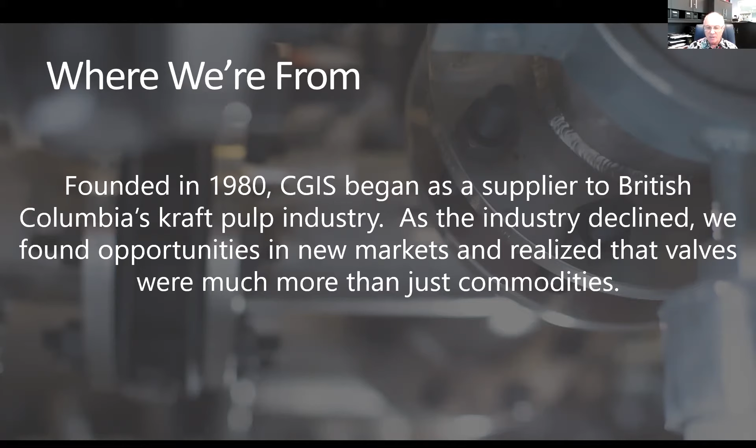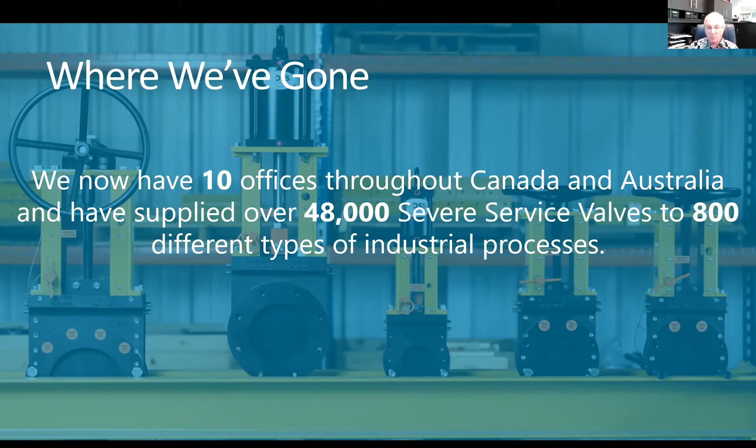But as it declined, we saw that we had to move and get elsewhere. So today we are 10 offices throughout Canada and Australia, and we have maintained a record of what we have internally called severe service valves, and have sold over 48,000 of them to a lot of different industrial applications.

As Julie said, I'm trying to share what I've learned and try to bring some new things to industry. And the MSS has given me this platform, as ASTM. And I think it's very important that as we grow older in this industry, that we find opportunities to give back to it. So really, what am I?

I'm a person who loves valves. I got involved in it, as I said, really early. I've had some really good people in my life help me.

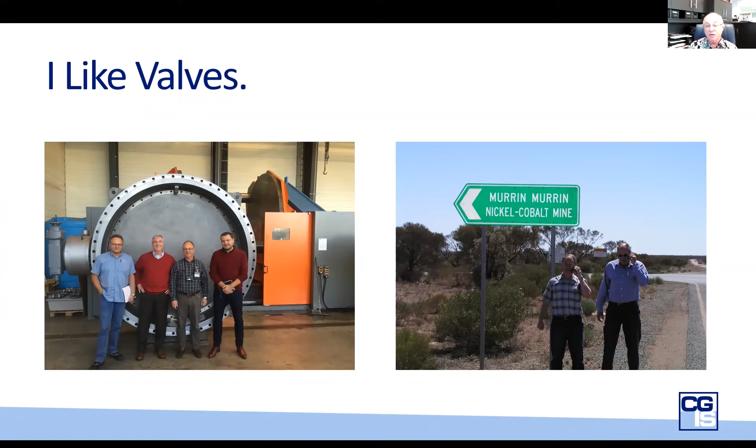The people on the left, that's Adams, a very interesting company from Germany and Houston, Texas. And one of the people you see on the right is actually a Valve Technologies distributor too in Australia, a very good personal friend of mine, Phil Brannigan, where we worked in Australia on the cutting edge of an industry called hydrometallurgy. All of these things went into what is going to be evolving from this presentation.

So I'm hoping today the presentation will give you a bit of a background in the history, show you why it should be useful, show the other classifications other than severe service valves, explain where I think we're headed, and then give you some key factors for selecting these things if we all agree that they're necessary.

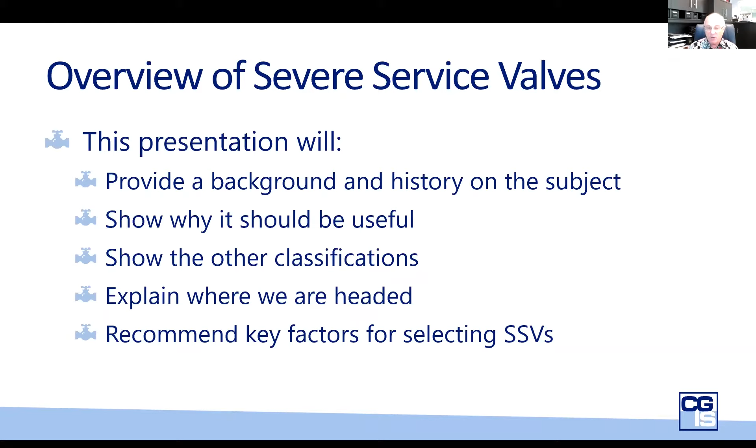The perspective I'm going to send over today is from my life as a salesman. That's how I look at all this. So I am a salesman, and even though I have this title of a chairman, that's not what I do. I've always been in business development, and the sales is what attracts me.

I think I'm a good one, not in the sense that I'm successful at selling, although I guess I am in a way, but I do it from a perspective of trying to look out for the benefit of the customer. It's like I'm spending my own money and making sure that what I buy is the right thing.

Part of my DNA is this thing called fairness, which itself is very subjective. I detest losing orders when I find it's not fair. And that's one of the drivers of defining severe service for me.

I've learned that there are no bad valves in the world. There are valves that are put in the wrong places and they fail. Just as there is no perfect valve, every valve has an Achilles heel. I'm a huge fan of valve technology because I know what it can do, and its design is one of the closest you can get to perfection. But still, it's not perfect. There is no perfect valve. So we always have to try to find the right application, the right valve for the application.

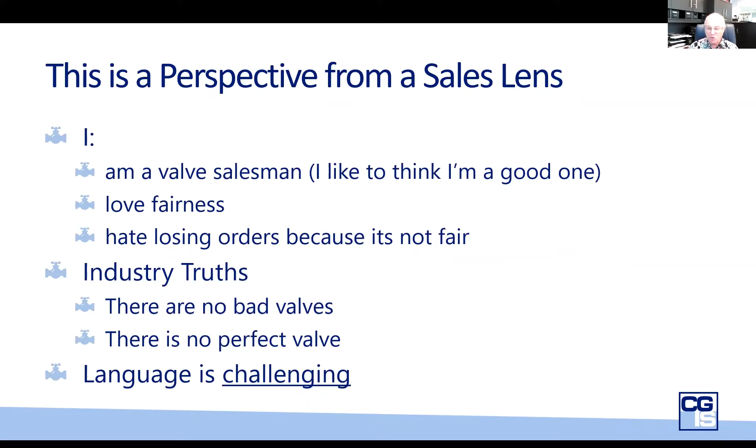On top of all of that, we have this thing called language. When we're talking about the same language, English, we have a challenging time confirming that the idea being presented is understood by the people listening. So language must really be focused on to make sure we get the right thing from what we're listening to.

I bid to the specification, which was clearly class 300, 740 PSI rating, 50 bars. I bid and lost. When I lost, I was surprised because I figured we were one of the world's leaders at this type of application in valves, and I didn't know who won until a year or two later.

I went to this mine in Chile and found out who the winner was. Then I realized why he won. He won because he passed the technical portal that said this meets the spec, and his price was lower. Well, of course it would be lower — his valve was rated to 300 PSI, and mine was 740.

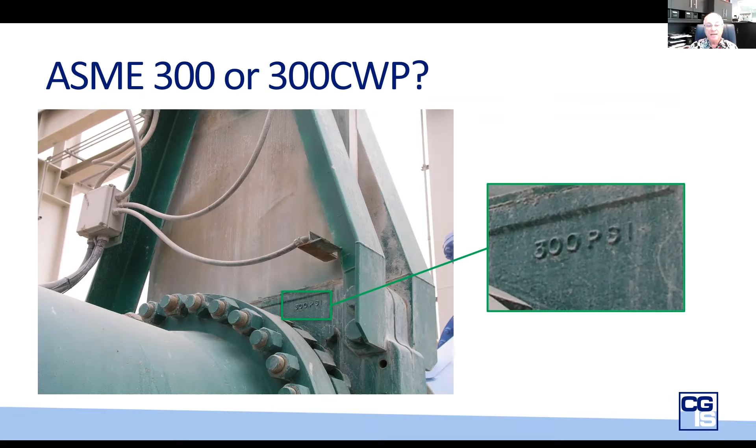So that was another arrow pointing us in the direction we're going: defining severe service valves, then defining fit for purpose valves, and then defining general purpose valves.

I want to stop for a second and have you visualize these three different criticalities. When I proposed this back in 2014, I didn't use those words. I used severe service valves at the very top, the most important valve. In the middle of the three categories, I proposed general purpose. And for the bottom, I proposed commodity.

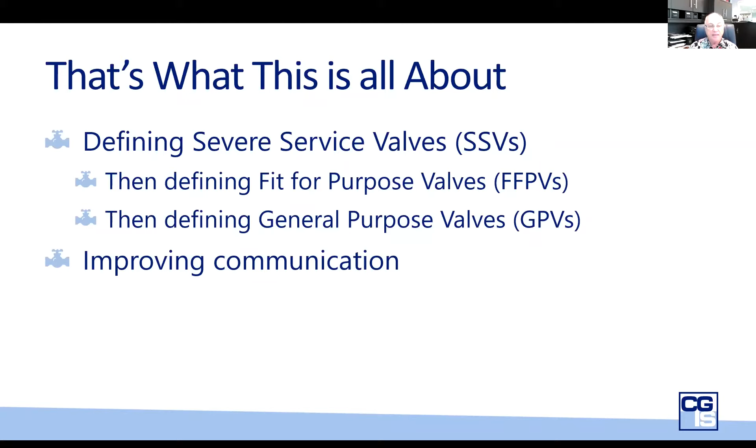The explanation, I think, will come along the way. Today I can't use those three different ways of describing it — I have to use these three, and I'll explain as we go, along with the communication about how this is done.

I want to make sure we're all clear that there's a very big difference between subjective terms and objective terms. Early in my career, I learned language like 'high performance' and 'tight shutoff.' They sound good, they sound important, and they are important in a way, but they're subjective. They don't have any way to really measure — how high is high, how tight is tight. Those things need to be put into a place where a third party can agree that the measure is correct.

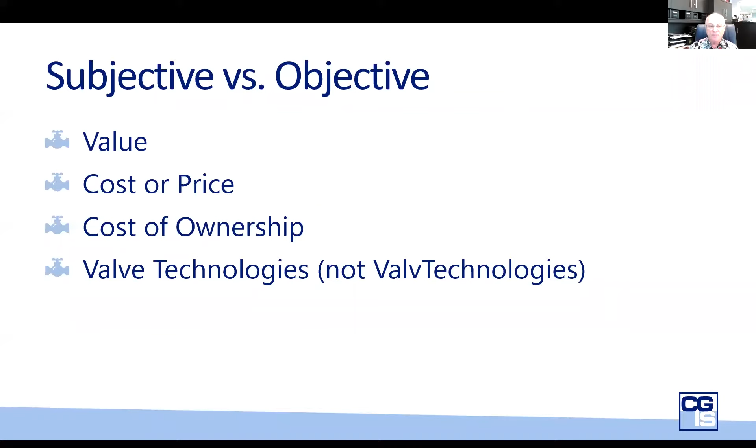So we have these things in our lifetime called value, and we have these things called cost and price. When we try to compare the cost to buy something versus the value of it when it's actually in use, there's a big difference. For me, I've always wanted to focus on the cost of ownership, and then look at different technologies about valves — not Valve Technologies the company, but technology about valves — because as I mentioned, there's no perfect valve, and each valve type has its place.

Valves, for all of us — maybe brand new in the industry, or some of us, like me, been in there forever — we all have a different way of looking at valves. But I think all of us in the world will look at cars in a very similar way. So I'm going to use these three slides just for a minute to give you some more ideas about communication. Here I'm asking you to choose which of these three cars is the right one for you to buy for your needs. I'm giving you some data.

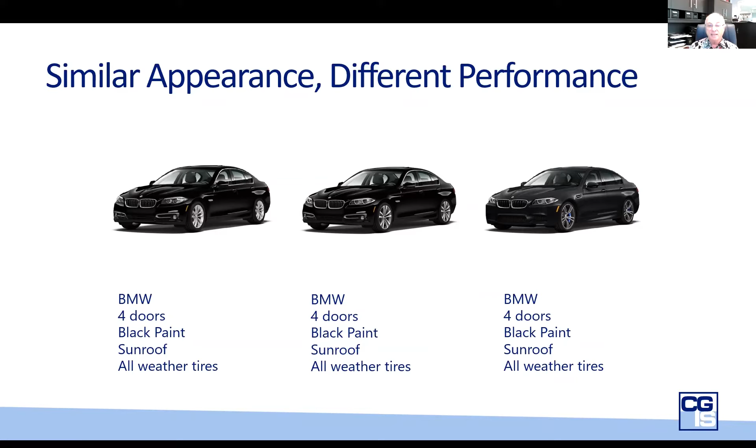I give you 5 pieces of information. The problem here, though, is this information I'm giving you isn't enough for you to make an intelligent selection. So I'm going to give you some more information. Now some of you may look at that and say, okay, that's what I need. I want to win a rally in a race, so I'm going to buy that one on the right-hand side.

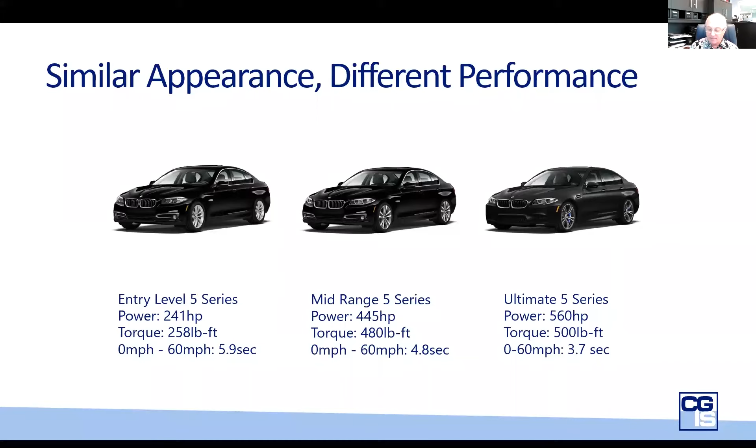Some of you are saying, no, I want this for my family vehicle, so you're going to buy the one that has the most economical fuel rates. That's the one on the left. And when I finally give you the last bit of information, how much it costs to buy, then you can make a better solution and choose what's best for the application.

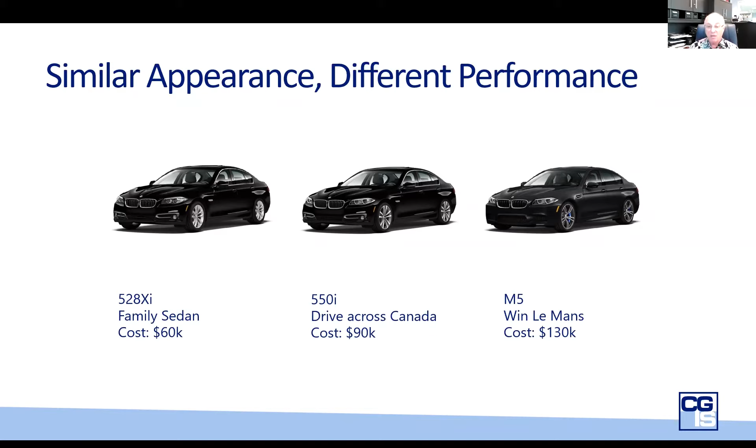So let's see why we think we can figure that out. Do control valves really control? And if yes, how long and how well? Do isolation valves really isolate? If yes, how long and how well? What about when the applications are very challenging? How do you arm the valve to survive? Do we need a different way of looking at severe service from general purpose? I believe we do.

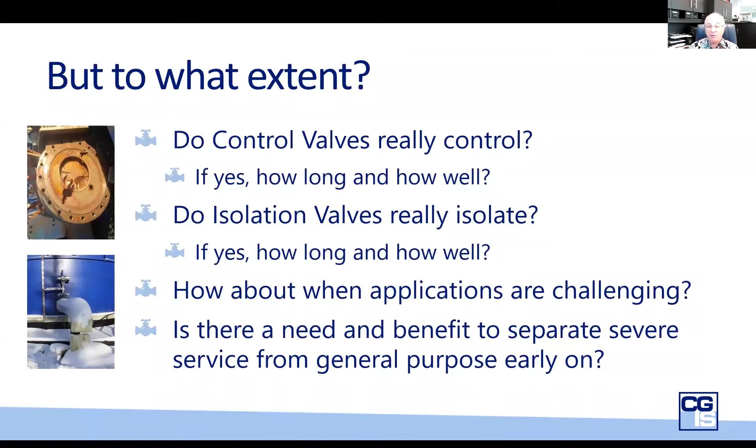In 1995, I had been playing salesman at this Cominco refinery, a metals refinery that is 100 years old. In a long time of being in business, they developed a lot of habits. They bought a lot of historical products. They had 23 different ways of making metal, refining metal, with different processes that required different types of valves. But in the 100 years that they were there, they had a lot of baggage, a lot of older technology. We got an opportunity in 1995 to really help them modernize the way they used valves and analyzed valves.

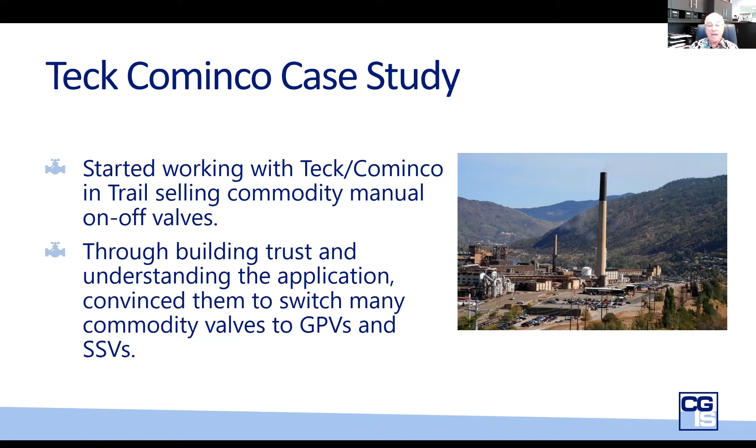We had a trust with them. We got an order, a 5-year order, to help them modernize their plants by using the proper valve. And this slide's a little rough to read, perhaps, but as we showed them again, this language that I'm using then was the commodity, general purpose, and the severe service. We improved their revenue by giving them more severe service valves where they were required and reducing the commodity valves where they were used.

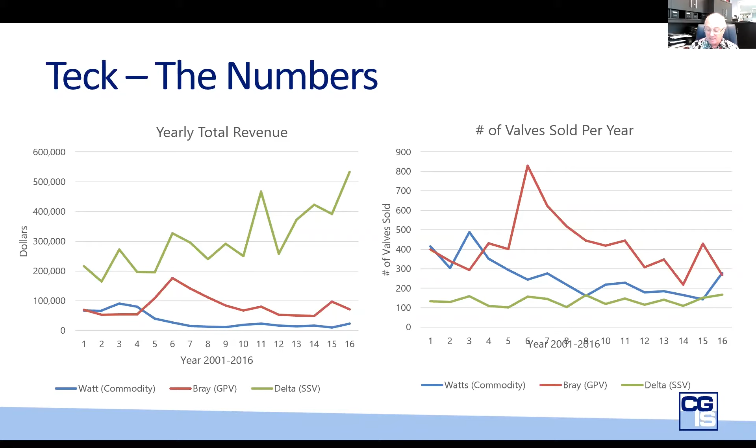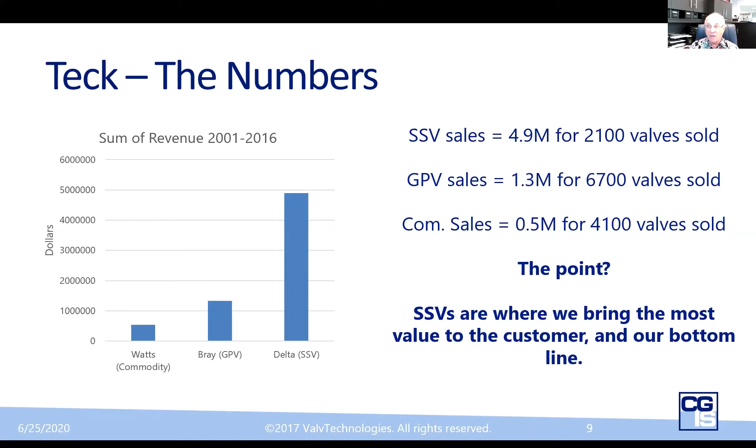So over years they benefited greatly. This was a good education for us and a very profitable education for Teck in those days. If you looked at the actual revenue, we made more revenue ourselves, 4.9 million on converting them to severe service valves, and much less in the commodities. It was good for our company, but it was much better for Teck. They saved a tremendous amount of money buying less annually and having more runtime in their operations. So the journey started back then.

It continued to go, this journey to what is a severe service valve. I started to decide to write some papers. In 2014, I actually wrote my first paper on defining what severe service valves were. That was the start of that. And from there, I decided that this is something that's going to be valuable, I hope, and I tried to attract the attention of the industry.

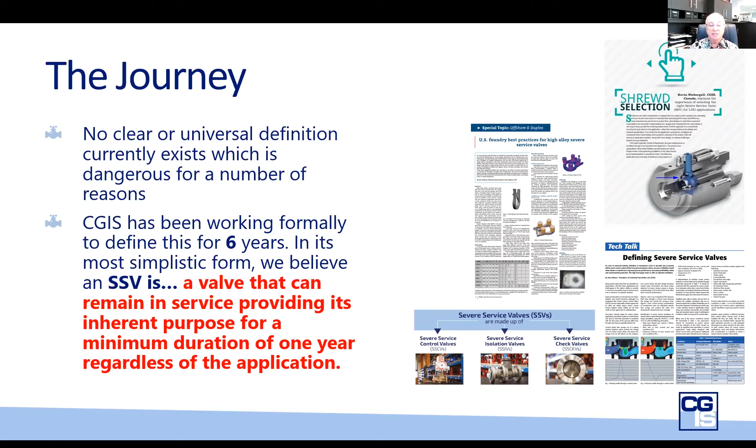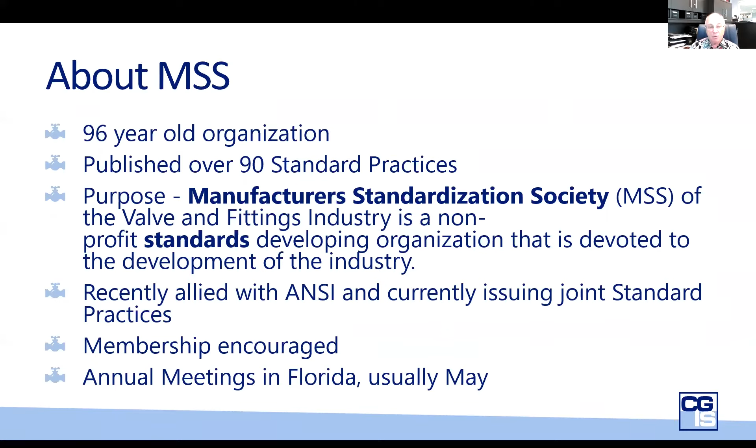What happened was MSS, which I had joined a few years earlier, mostly for the knife gate valve standards that were in those days really poor, and we needed to create a new one. They were eager and open to improvements in their industry. So I asked them, would they be interested in this topic? And they said yes. What I also would like everybody to realize, this is a great company society to grow, and if you're interested, please join it. They are pretty low cost to be a member, and you get a great deal of value, and you can participate in our industry for the benefit of everybody.

So right now, there's currently 60 standard practices in update. Their mandate is to update them every 4 years. I can tell you that for those of you that are in the knife gate valve business, the original knife gate, MSS SP81, made in 1960, it was surpassed by MSS 135 in 2010. We're now in the 4th edition of that one, and it's grown from class 150 through class 600 knife gate valves.

So it's been an expansion. There are 17 active projects right now, including severe service valves, defining them, and a new special high pressure gas test. In 2017, they joined with ANSI to jointly submit these units.

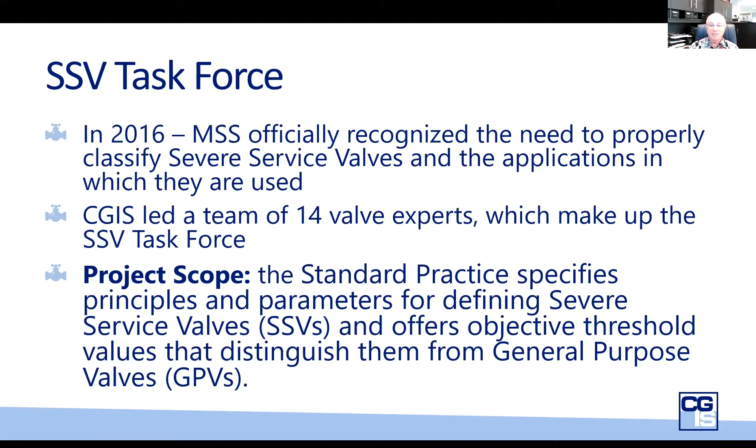In 2016, they officially gave us permission to go ahead, and we got a team of 14 people together, members from different companies, to do the task force. Now that's 2016, and today is 2020, which gives some idea about the complexity of this subject, perhaps, that we're not there yet. We started with a work number, PN 16-20, and we took a vote on those days.

We decided that this was the title that was acceptable, severe service valve. We had no negatives, and that's very important because you cannot publish a standard with any negative. They have to be resolved. So here's the start, the official start, May 11, 2016.

Now, today, I'm still waiting to publish it because since then we've had one negative vote that we are unable to convince to change. This is an internal issue that we're trying to wrestle with, but it's a bit frustrating that it's taking this long to do something that everybody else in the MSS thinks is a good thing. I do accept that the negative vote has some validity, but it should be resolved because it's good for the industry. So there was a purpose.

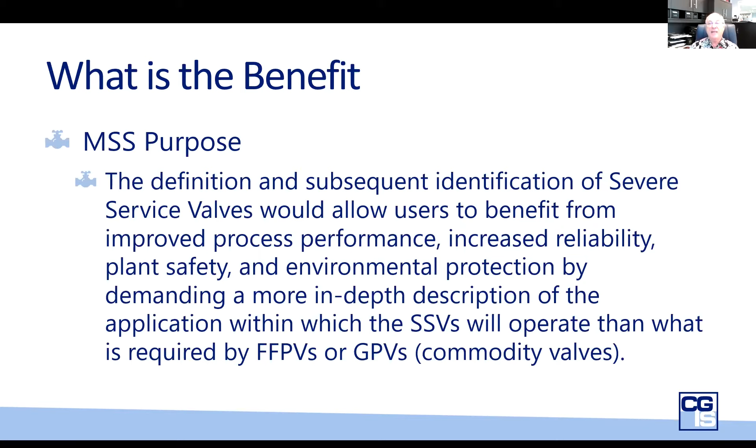Again, in the early days, it was defining just severe service valves, and then it's grown, and we're trying to get to a point now where we can define not only severe service valves, but the other categories. We agreed with measurements on what a control valve, severe service valve, looks like.

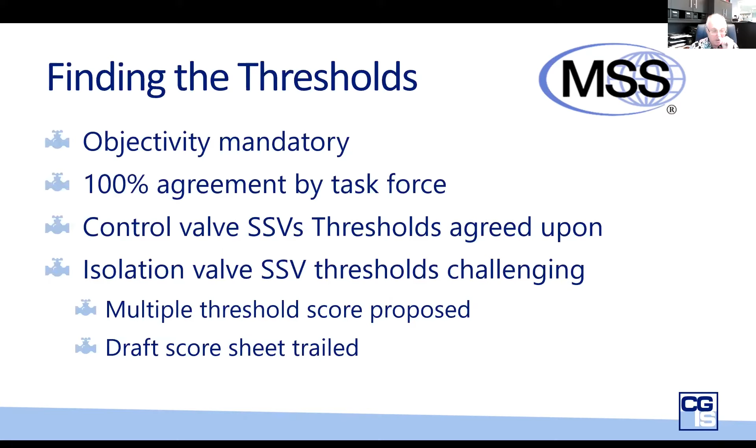There is very clear evidence that if you have a certain condition, like cavitation, for example, that is definitely severe and it has consequences. The challenge that has taken us this long for isolation valves is that there's no single clear threshold for which you can say yay or nay. What we've had to do is come up with a multiple threshold score, and that's where we're at today. We will show you what that looks like in a minute.

From my perspective, and this is really from our company's world and probably very similar to valve technology, there are severe service valves in three different categories, although check valves are not really a secondary part of isolation control. They're somewhere in the hybrid side. But isolation valves, definitely. Control valves, definitely.

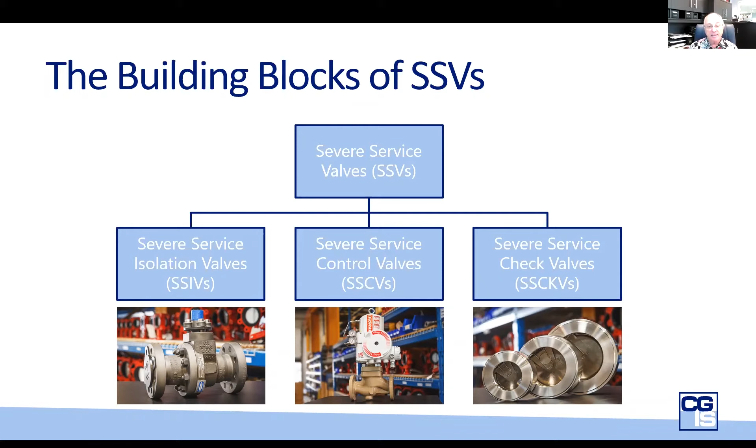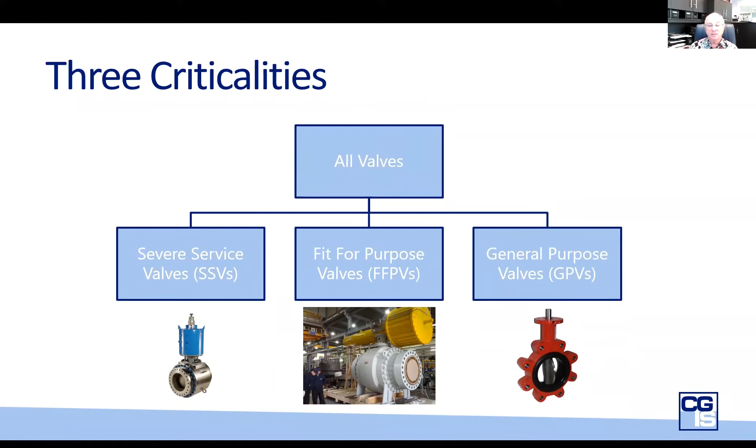Now we're trying to put them into severe service, fit for purpose, or general purpose applications, and give guidance on why that happens and why it's important.

If you look at the characteristics of a general purpose valve, they're typically not consequential if they fail. They shouldn't be if they do. You look at things about a leak rate. Is it important? Is it critical?

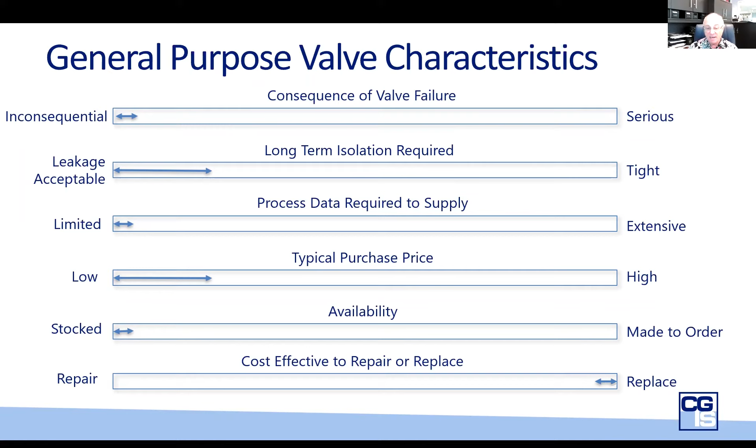If it's important, they shouldn't be used. Do you need to have a lot of process data? Not necessarily. Really, you're buying a commodity. The purchase price is low, availability should be from stock, and you're not likely going to repair it, you're just going to replace it.

A little harder and more important category would be fit for purpose, where the consequence of failure is higher. The leakage acceptability may be uniquely tighter. Your purchase price is not the lowest thing in the world because it has value and you're going to be able to amortize that cost. It's likely still to be stocked, but maybe not everywhere, and it may start to become cost effective to repair it.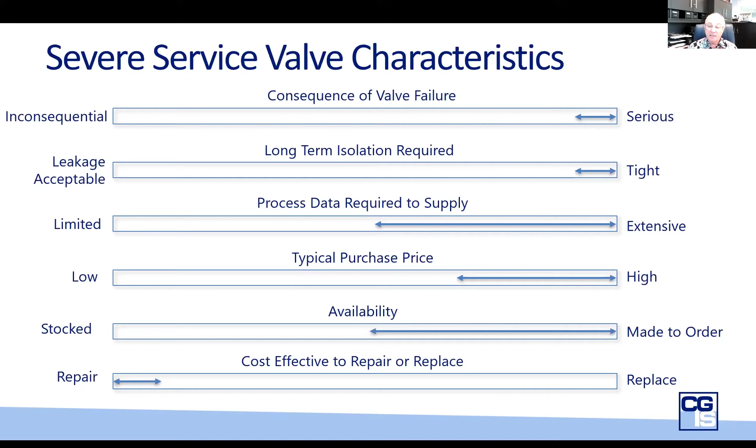Availability - it's not likely to be stocked, although more of us who focus on severe service valves are willing to put in inventory that is in stock. But often it's a made-to-order recipe, and you should likely repair it because it is an asset.

So what we did, as I mentioned, it's very challenging to come up with a single threshold. We came up with a checklist and a score sheet, and I've used this myself for the last year or so. It's getting to a point where it's got a high degree of sense - it's starting to work. I don't think personally that we're actually there yet, because this is the starting point of our journey. We'll have input from the industry where we need to change these values and come up with something different. But the idea makes a lot of sense.

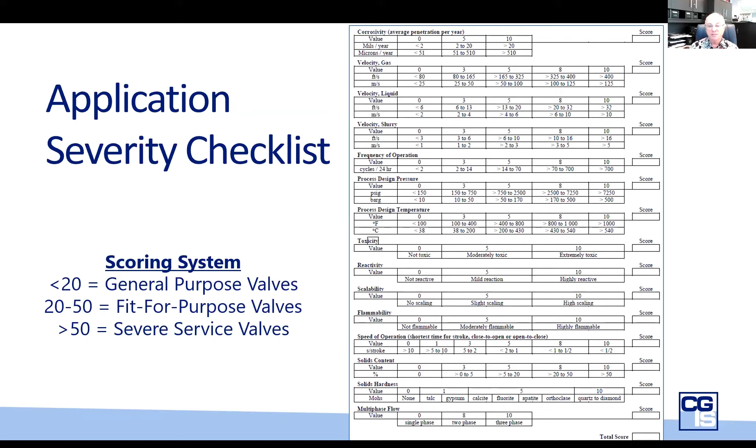So under 20 on a total score, you're likely to be able to use a general purpose valve. Between 20 and 50, more likely to use a fit for purpose. And above 50, then you need to have a severe service valve. So this starting point gives us the objectivity that we want, to include the fairness factor, or having more people see the world from the same lens instead of eyes.

So what happened from the beginning in 2016, when it was defining severe service valves, we are now through the draft - I don't know how many drafts, it says draft 5C, but it's probably draft 20. The title and scope have changed to guidelines for classifying severity of valve service conditions. This is a big change, and in MSS, any change in the scope and title means you've got to go back to the drawing board and have to revote. And that may be one of the reasons it's taken so long to get this thing across the board.

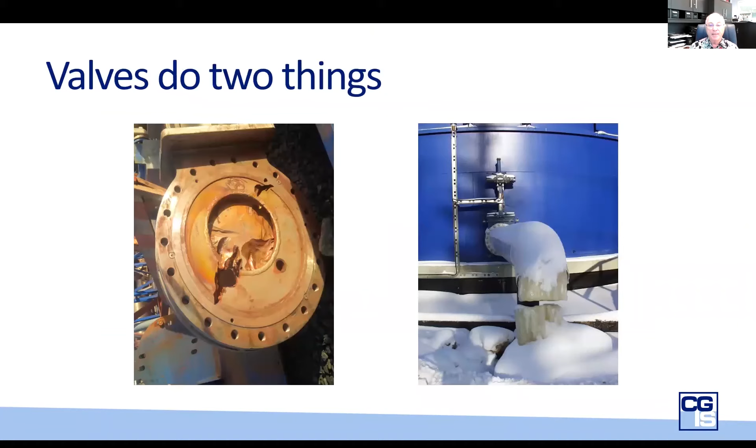So again, as I mentioned, valves only do two things. Let's go have a look at some of the details that come about this. So whatever industry we're in, there are applications that should or benefit from using severe service valves. Some industries actually have a much higher percentage of severe service valves than general purpose. You can compare a refinery to a wastewater treatment plant - you're going to have way more SSIVs in a refinery than in a wastewater treatment plant. But a wastewater treatment plant also requires a valve to do something that is challenging for most valves to do. So even there, we will have a place for an SSIV, just a lower percentage.

So in my opinion, and this is an opinion, not fact, but I believe from what I've seen, severe service isolation valves are not gate, globe, or checks that are made to those specifications. I've never seen a wedge gate valve isolate as well as other valve technologies. It's an industrial revolution invention - it's time to be retired to that bottom rung. I probably am going to offend a few people who sell that, but that's my opinion.

Soft-seated concentric butterfly valves, like the old Keystones or Greys, they are not, in my opinion, a severe service candidate. They may go into the middle section. SP-81 knife gate valves, the original knife gate valves, they just cannot isolate properly, so they cannot be severe service isolation valves. And pinch valves are in that same realm.

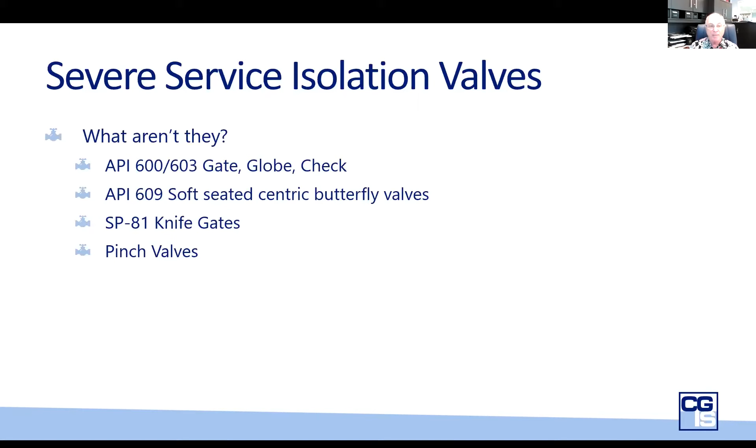Triple offsets, guided shear gates, which is a passion of mine - you'll see why in a minute, because I'm very involved with this type of valve - and the parallel slide gate, again this is the valve technology ISO gate. It's quite different from the 100-year-old valve that was designed as a parallel slide back in the Industrial Revolution.

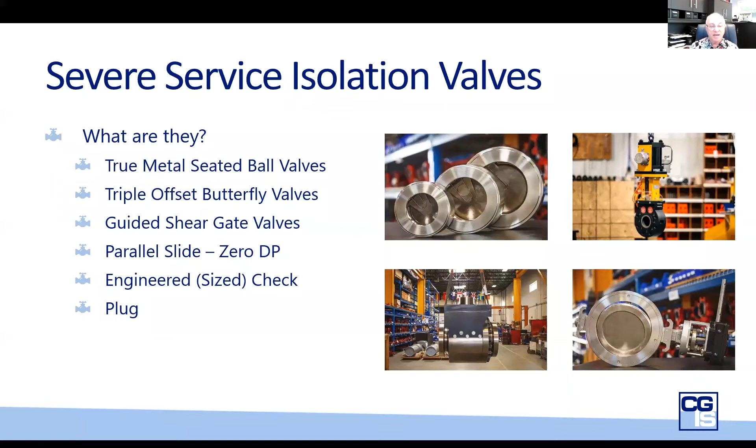And the word check valve 'engineered' is because check valves, like control valves, should be sized for the flow, not for the size of the pipe. That's one of the biggest reasons why check valves fail - they're put in at pipe size. And there are plug valves, sleeve lined, that meet this terminology.

One of the things I want people to think about when it comes to isolation valves is the life history of that valve when it's doing its job. Isolation valves are kind of unique in that they have 4 different states of life: they're either fully closed, fully open, or cycling between those 2 states.

This has led me to understand the importance of knowing more about the valves I'm trying to solve for in isolation conditions, when I don't know how many cycles I'm expected to live through, I don't know if I'm starting as an open or closed valve, and I don't know what happens to the dynamic state if flow is moving while I'm closing or opening.

Without knowing that, I can't hope to make a good solution. The control valve side of business gives that inherently because we're solving for flows that are continuous. Here I've got 2 static basic conditions and 2 dynamic. So I need all that data, which is more challenging than you might expect in the beginning.

Corrosion allowance is a very important component of how well and how long the primary sealing components of my valve last, whatever it might be - a ball in its seat, a butterfly in its seat, a gate valve, a knife gate valve. What is that corrosion allowance so that when I'm in service after a period of time, I still have the integrity of those sealing surfaces to give me the isolation I want?

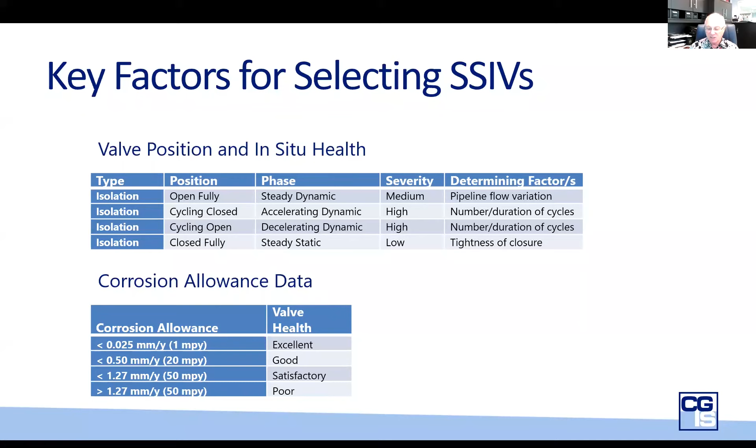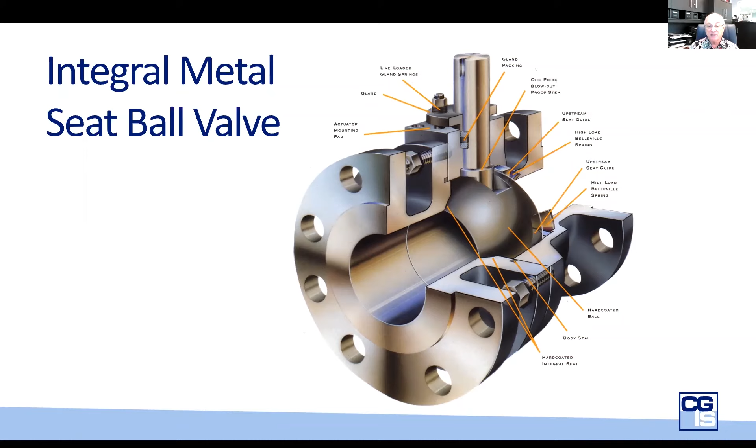So here's what we're looking at. This is the true metal seated valve that I've grown up with. Part of where I am today is because of valve technologies. I really think Kevin Hunt was a master magician in bringing the concept of the integral seat from a different valve into the ball valve, and having the ability at that time to coat it with carbides was a great gift to the world. This is the finest isolation valve in the world, in my opinion.

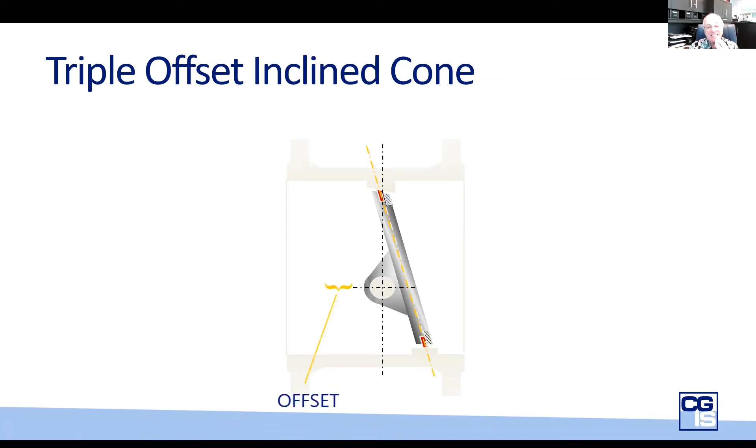I also have a great respect for the triple offset. This was designed and patented in 1960. I really trust it to do its job. This is Adams' invention, and what I like about it is if you look at it carefully, it's very careful to understand they have different isolation abilities based on the amount of torque you give to this valve.

So if you look at the bottom, if you only give 64% of the closing torque, it's not as tight as I would like if I'm on steam. Class 4, that's failure in my opinion. Class 5, that's failure in my opinion - it's allowable leakage. As soon as you get to 80% unidirectional tightness, then in one direction you get 0 leakage.

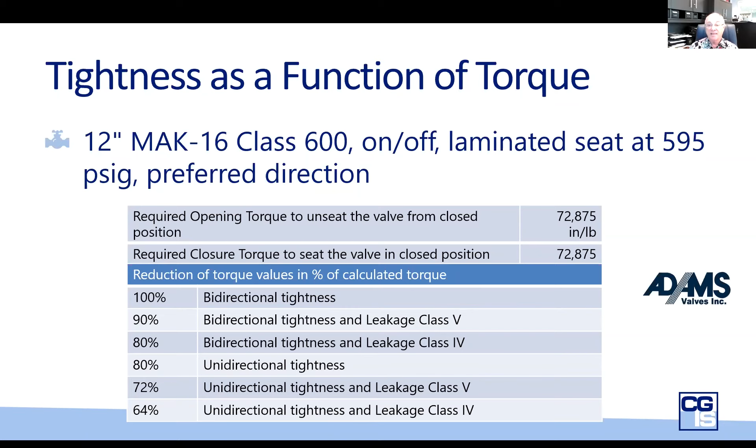The Germans, which this company is, use 'tightness' - perfect tightness is the same way I say 0 leakage. And if you do bidirectional, 100% of the torque required, 72,000 inch-pounds on that valve, you'll get bidirectional 0 leakage. That's objective - that's not saying 'tight,' that's saying 'wow, that's measurable.'

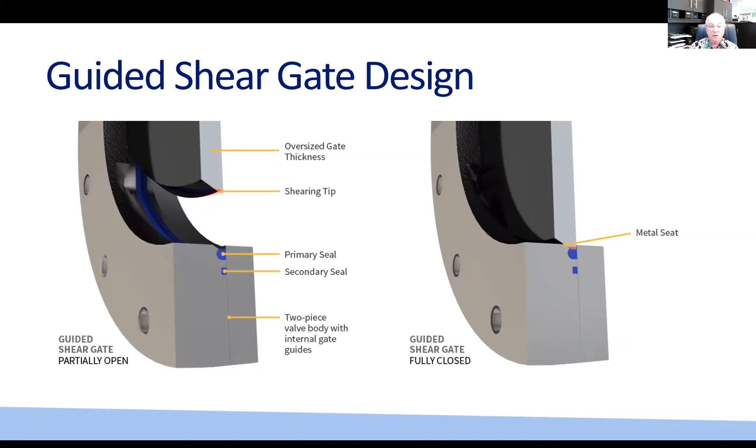The guided shear gate, as I mentioned, is a type of valve very close to my heart. I sell a lot of these globally. This is again a 1960 original patent, but it's been improved in 2017 to be a much different animal than it was in the past. And it's able to cycle, close, and isolate perfectly - 0 leakage in dirty, disgusting applications.

And if we have time today, I want you to look at this picture - anybody can tell me there's 2 very wrong things about that valve. So have a look, think about it, and we can talk about it.

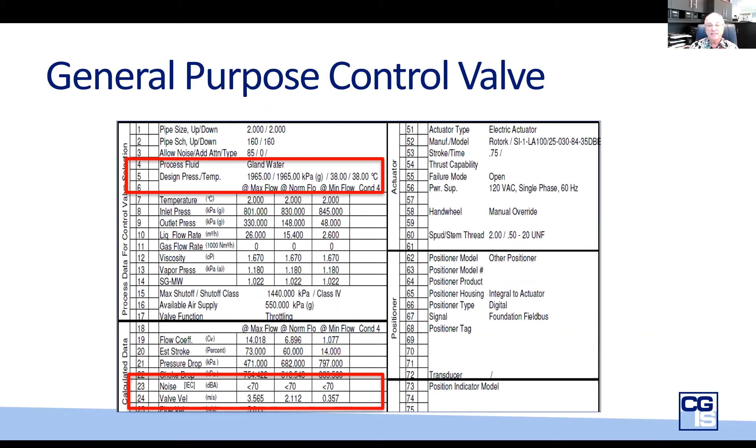So let's go look at general purpose. Why is it general purpose? Because the fluid is easy - water. If you look at the velocity, it's not very quick for a control valve, so this doesn't require a special design. If you look at a severe service control valve, it's much different.

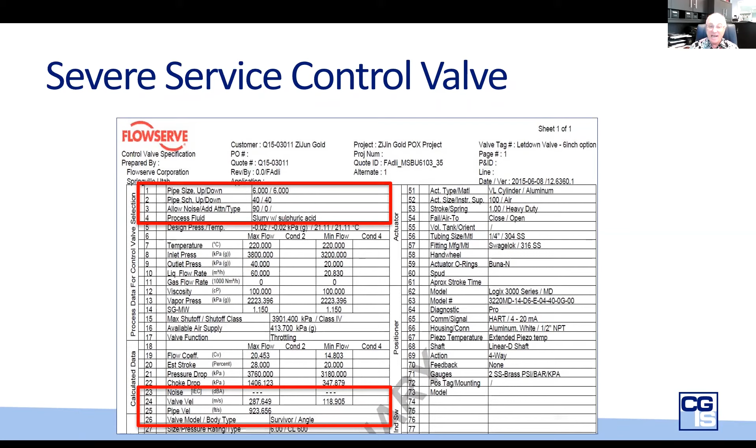Here's the process fluid - it's slurry, sulfuric acid, and it's really moving. Look at the feet per second - 923 feet per second of a slurry. That's a challenge. And the same thing in the ball valve.

Here is a very challenging ball valve in the mining industry and hydrometallurgy. The requirement here is something that came about in the industry maybe 15, 20 years ago - the so-called 'zero leakage bidirectional.' I wanted to know, what does that mean? How do I test it? If I'm metal seated, give me a test that requires zero leakage. I don't think there is one. Valve Technologies has one - that's an internal company.

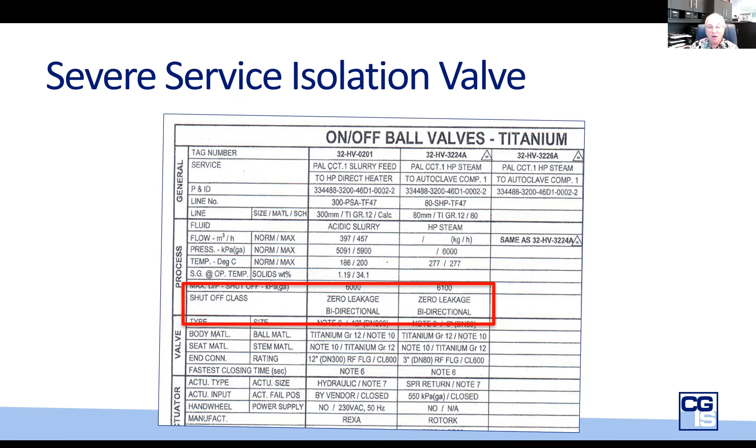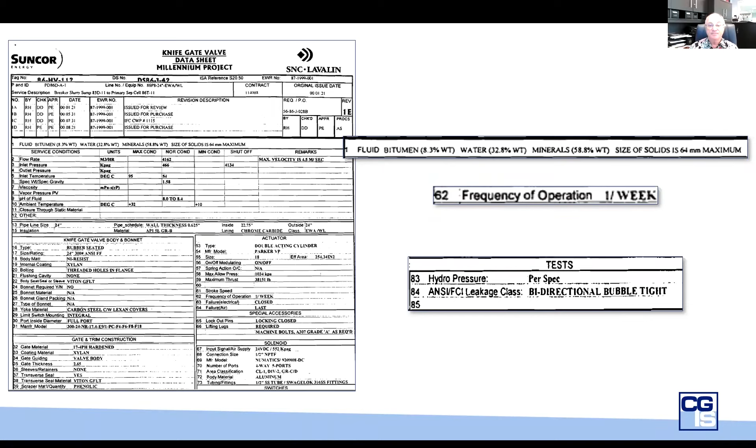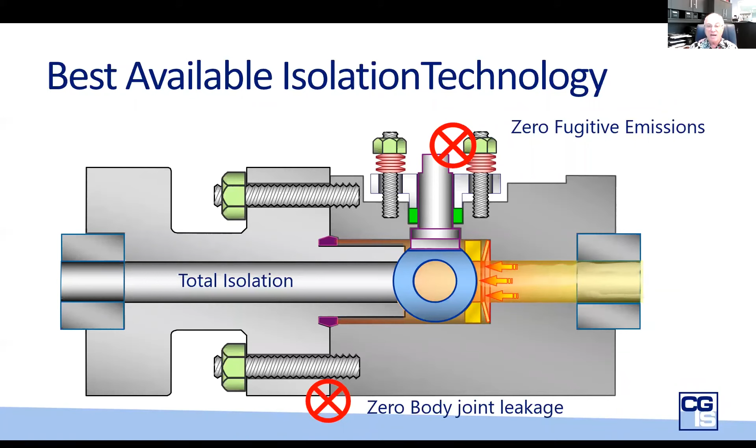That's a challenge. So what we do is we look at all of these applications and say, which is the best technology, best available isolation technology? Here I'm also always going to come back to Valve Technologies, which has an incredibly good way of solving that isolation - the so-called best zero leakage, total isolation. Not only closing fluid from upstream to downstream, I don't want to have any fugitive emissions. I want zero there. I don't want any body joints. I don't want anything from inside going out. That's the best technology. When things aren't perfectly tight, bad things happen.

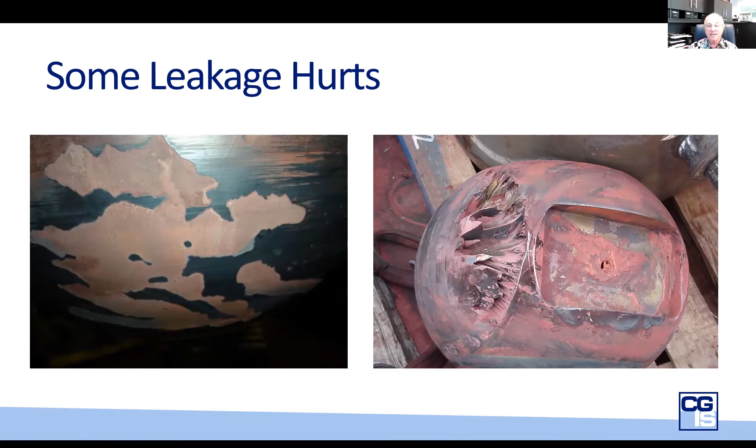Here's the picture on the right, a valve that cost $300,000 to buy and lasted 17 weeks because it started to leak. And as soon as it started to leak, the differential pressure, which is the enemy, and the fluid, which is the slurry, made that valve fail very quickly, and they lost the containment of their system. So there's lots of bad things that happen when you choose the wrong technology and it fails.

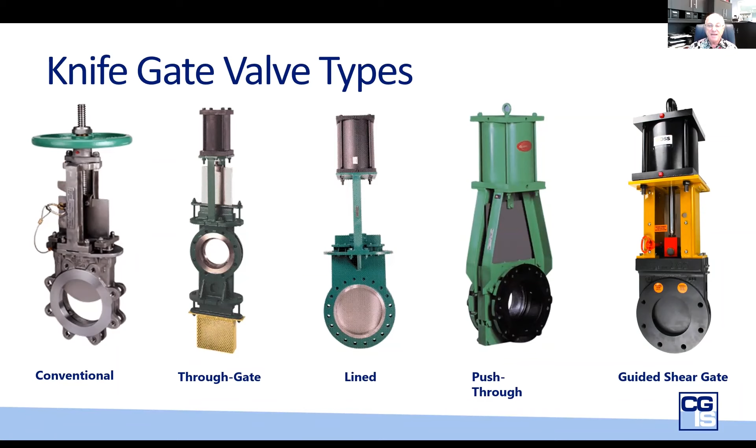And some of these are going to be part of where I'll give you some better examples. Here's a picture of 5 different types of knife gate valves. All of them are knife gate valves, but they all function differently. And it's this misunderstanding of how they function that causes issues.

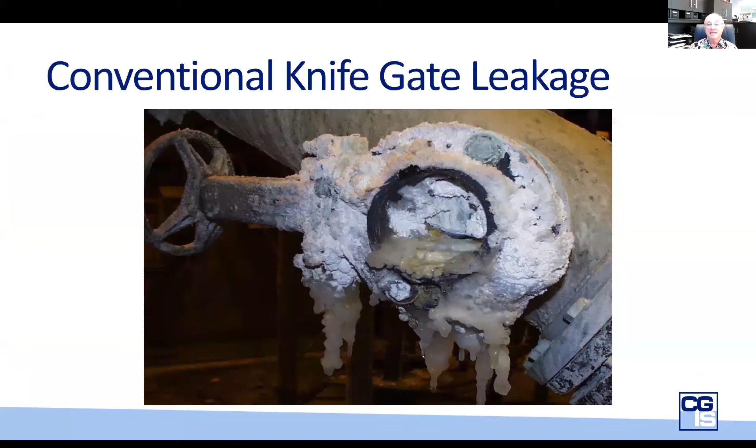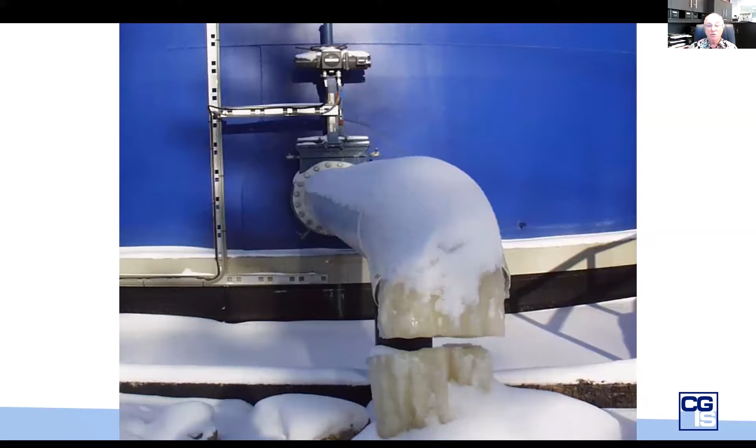Here's a conventional knife gate valve. It leaked, and because it leaked, it allowed the process that was pregnant to precipitate and become a clog for the valve to operate. This valve, very well made by a reputable manufacturer, failed because it had a leak rate far higher than what was necessary for the containment of what's inside it, which is just water. And here that leakage made an iceberg, which sealed the valve and wouldn't drain the tank if it was required to drain.

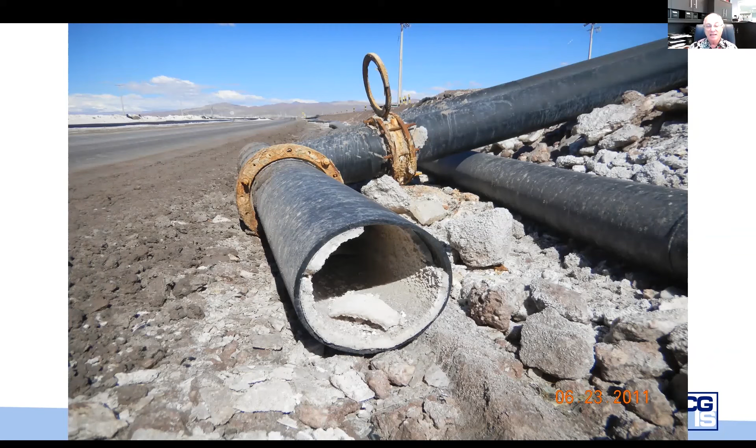This picture is important to me. When I looked at the data sheet to supply the valve, the fluid was brine. Well, that brine was saturated with solids, and what happened is they precipitated out as a solid inside the pipe. That's what's going to happen inside the valve as well. So if you don't factor in the extra drag or the presence of solids, you're going to have a hard time solving the problem.

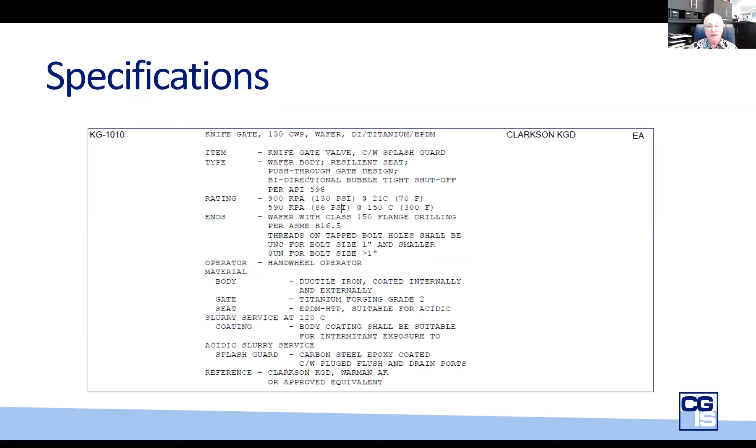I love to look at things from a different lens. Here I see a specification by a reputable engineering company that chose a Clarkson KGD, a very good valve for mining. But is this mining? Look at the gate - titanium grade 2 gate material. What mining would use that? And look at the body - ductile iron, coated internal and external. I think there's a pretty big difference in the corrosion resistance between ductile iron and titanium. And if I need titanium and EPDM to save my body, then I better make sure that the valve doesn't have external issues.

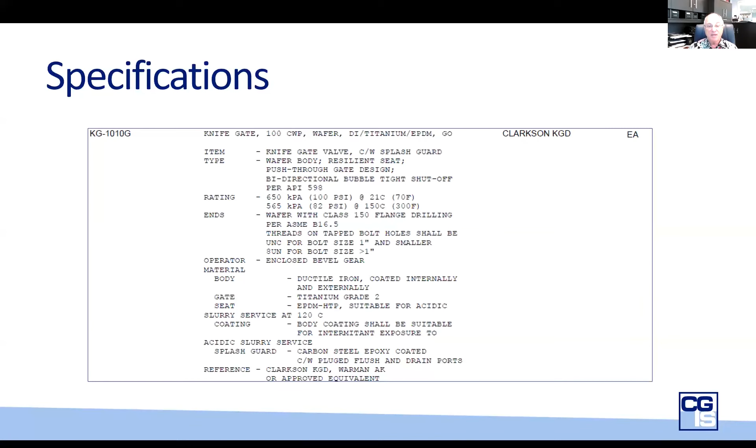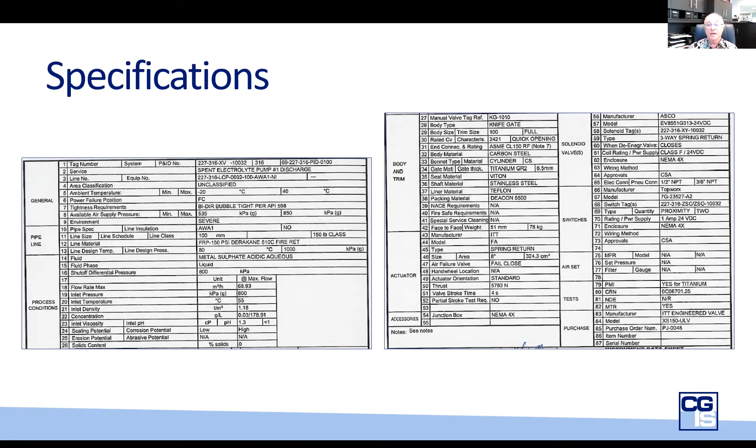So this one was built for a project which I knew would fail, because they didn't understand what this valve did. What they actually bought was similar - they bought from a different manufacturer, but a reputable company, ITT Engineered Valves, and installed it with a carbon steel body, not lined so that it was protected.

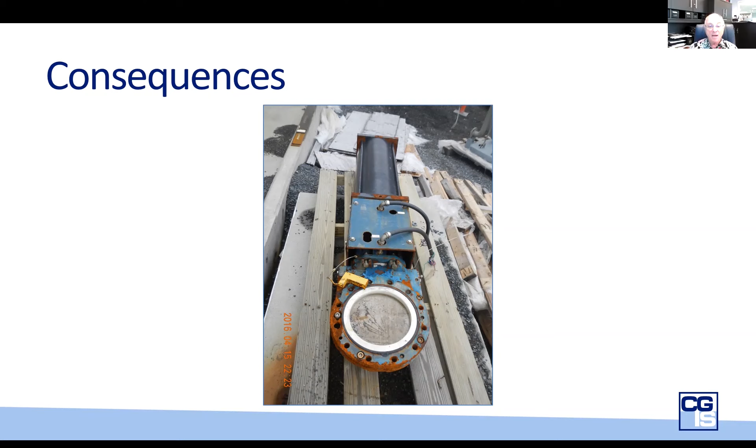But here's what happened. In a very quick time, external corrosion ate the body from outside in. That titanium gate and the Teflon seat were okay, but the valve failed, and the money spent was completely wasted. The same engineering company didn't learn from the past and put in the same types of valves in another facility, where we're watching acid pour out of that valve when it's open.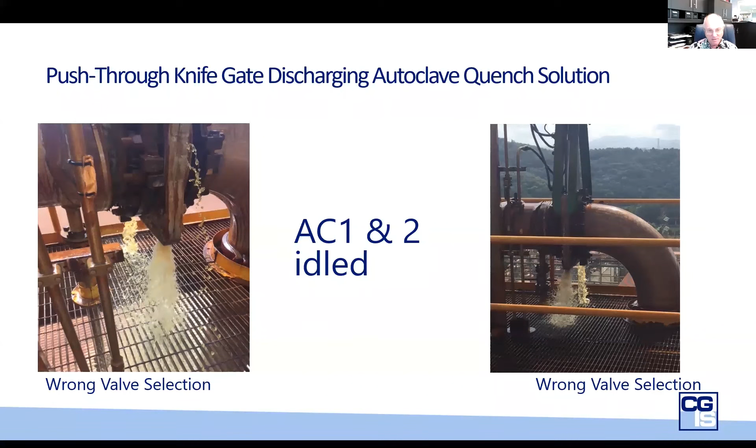And what was the consequence? Autoclave 1 and autoclave 2 had to be idled, and the idling cost them $134,000 an hour of lost profit because this valve was discharged.

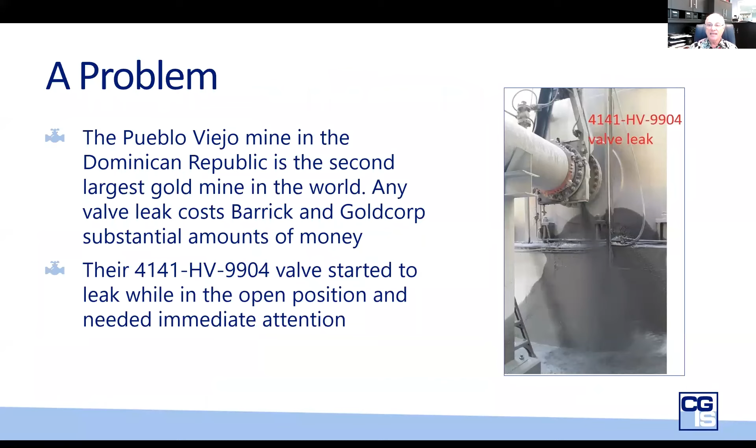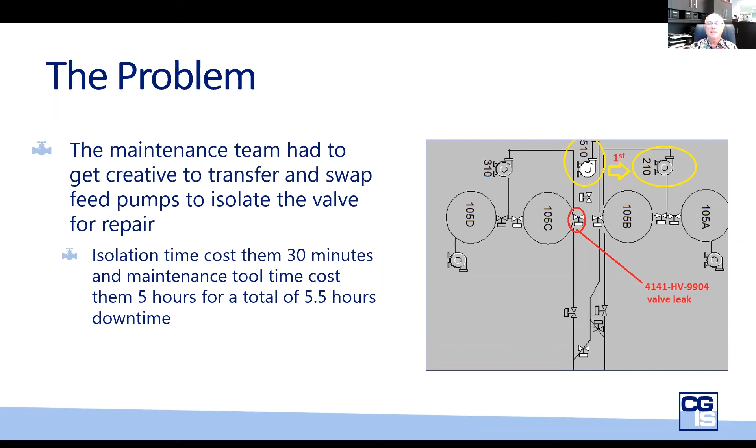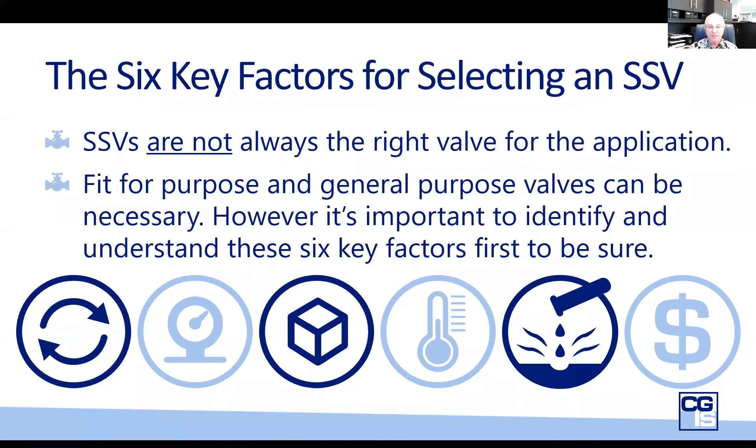So we're getting to where I think we need to focus. I don't believe that SSVs are always the right valve for the application. There's a place for general purpose and a fit for purpose. We need to understand where they should be.

What's very important to understand is the number of cycles, the differential pressure that's happening, because it's differential pressure that's trying to make the leak happen. The solids - are they in suspension, are they in solution, are they both? Is it a pregnant solution that when it stops can no longer hold the solid in solution? Is the product resistant to corrosion? The titanium and the EPDM in the past slide was, but the ductile iron or carbon steel wasn't. And then temperature and abrasion and erosion.

I just like using that slide on the right there, the iso-corrosion chart for sulfuric acid. To me it's a really interesting problem. If you're using sulfuric acid in your process, and you're adding other parts, you're dewatering, you're adding water or different chemicals, the concentration of the H2SO4 changes, obviously.

Look at what metals work and don't work. Stainless steel works on low temperature, low concentration acid, as it does at the high end, 93%. Ductile cast iron, WCB, CF-8M are fine at very high strength but limited area. But in between you've got to use Hastelloy, super duplex, a whole bunch of other materials, and they change with temperature and concentration.

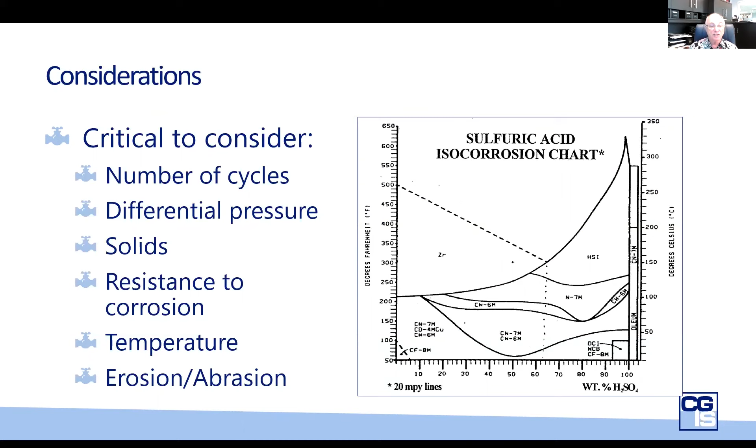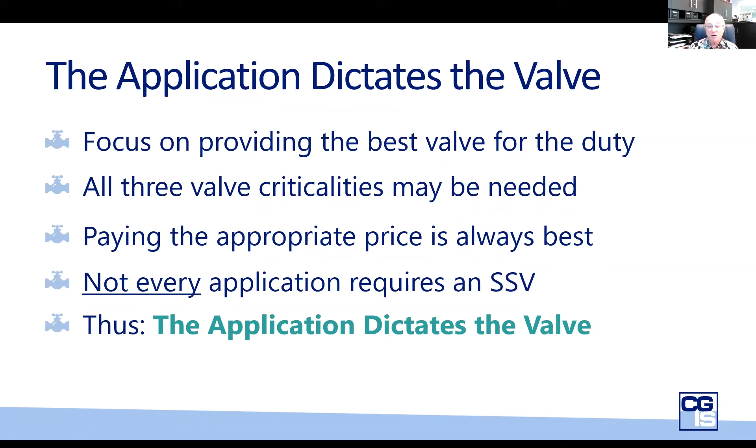We have learned ourselves internally that the application will always drive you to what is the right valve technology. I think it's always best, obviously for the long term, that you choose the best valve and criticality for that duty. All three are going to be needed at some point. Paying the appropriate price is always the best. Not every application requires it, we accept, but I do think it's important to know where it makes a big difference. On top of all of that, one thing I've learned on the severe service side of things is you really need to pay attention to servicing and commissioning.

This slide is illustrative of trying to do the right thing, but understanding the world's a complex and difficult place. This picture is one of 35 titanium check valves in Madagascar. We sent the valves with IOMs printed in English, French, and Malagasy, the three languages spoken in Madagascar, so that whoever installed them would install them correctly.

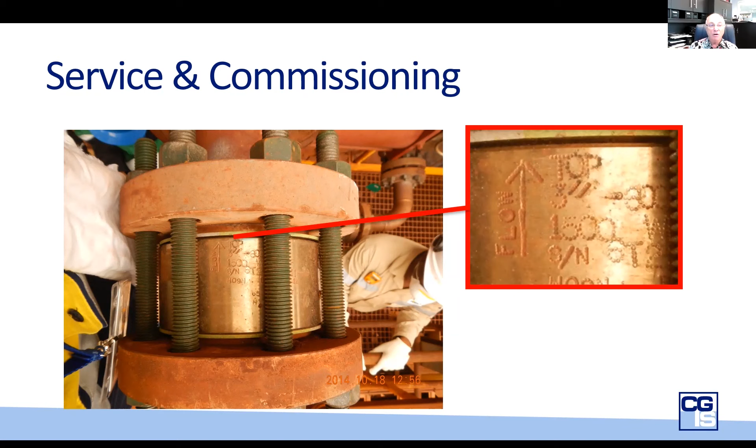This one of 35 is installed correctly - I can see the arrows in the right direction, I can see the word 'top' on there. But the reality was 22 of the 35 were installed upside down, and that affected how they survived. So for us, we really need to understand that sometimes you've got to spend a little bit more to get that servicing and commissioning.

So we've learned a few things. We've learned that application details are really critical. There isn't one size that fits all. There's always going to be likely an engineered, unique situation where you have to have the ability to see what's necessary. What is that normal starting position for an isolation valve - open or closed? They're different. How many times during the required cycle life will that valve be required to do that? What is the minimum time it has to perform over this, and what is that performance?

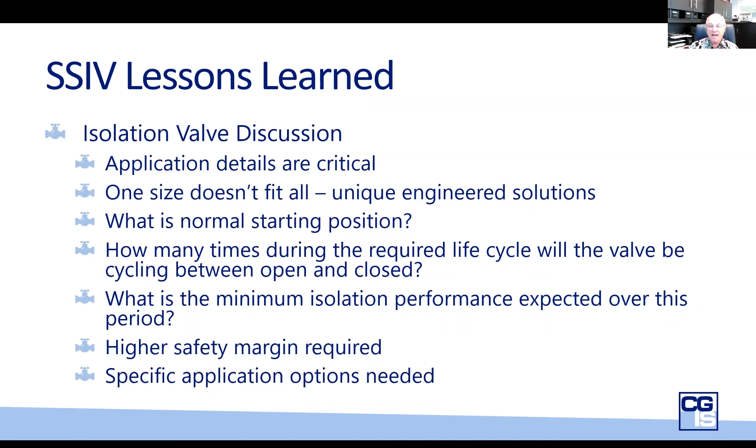We use the words in North America very loosely. If you look at a lot of specs, they quote class 4, class 5, class 6. Does everybody realize that the title of the standard that comes from is the allowable leakage rate of control valves? Why are we using it to define what isolation valves are? I just don't think that's right. I think we can all expect that we need a higher safety margin for actuation, and we need to have very specific options for these applications.

For me, it's very important because now it levels the playing field. I won't lose an order if it's done this way to somebody who didn't understand that 300 psi is not class 300, and quoted a valve that didn't work. That money was completely wasted. So there's a fairness equivalent there.

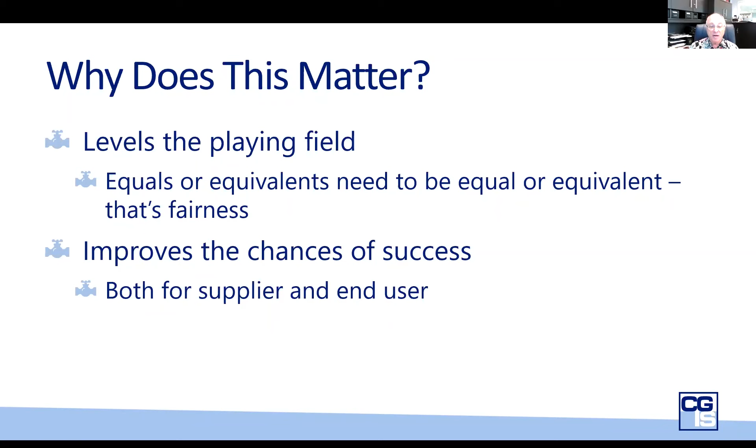And then we get a chance to be more successful, both for us and the end user, who is really the person that we need to do analysis for. So let's spend more time up front really understanding what the process guys who design these things and the operators who will operate them really need and want from the thing. Get that detail, get it all up front in the beginning so we can be competitive fairly to everybody else that's there, because we're not trying to eliminate everybody. It's got to be a situation where you feel that there's going to be some competition, because that helps drive us.

Use some new tools. There are some things like better testing. The API 598 is a good test, but is it valid for all applications? It's only done for 15 seconds to 3 minutes, 5 minutes, using a benign fluid, air, water. Is that valid when you're talking about superheated steam? I don't know. I don't think so.

And in the future, there will be more data coming, so we'll know what's happening to valves. One thing I have definitely learned in the last little while is that operators don't necessarily operate the valves that we supply them in the way that we think that they're supposed to be operated. And with the intelligence that's available through the internet these days, IoT, we're going to gather that data that will help us push this even farther.

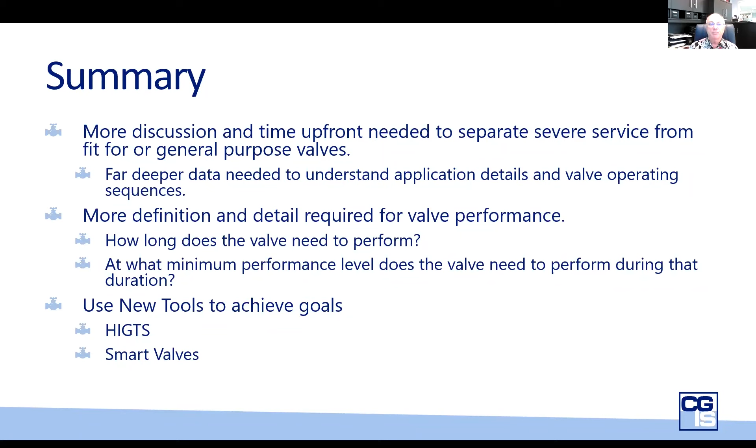So let's understand that for sure, many industries, 1 year is not enough. But in a lot of places, what I go through in hydromet, there's not a hydromet plant in the world, there's 70 of them, that can guarantee they can go a year without a valve failure. Not a single one. And we've been practicing some of this stuff for 50 years. There's one plant in Australia, Murrin, that started up in 1998. It has not reached nameplate after all these years, and it's because of valve fault.

We need to make sure that the corrosion allowances are much, much tighter than the pipe they're involved in. You got to make sure that the actuators have significantly higher output, because in severe service, often things change. You start with a nice sweet fluid, and at the end of the day you've got 2 inches of pipeline ID from the solid precipitation. There's a lot of different things happening in your operation, and you've got to consider those, static and dynamic.

And while CapEx is really critical, we got to be able to balance it with what it costs you to own this. Experience does count. I think it's foolish for companies to go to pipe, valve, and fitting companies that are in the Walmart side of the business and expect to have a really great solution on a severe service. It costs too much money to be in the severe service business. You need a different set of people, a different set of manufacturers. It's likely that you're not going to get the same result.

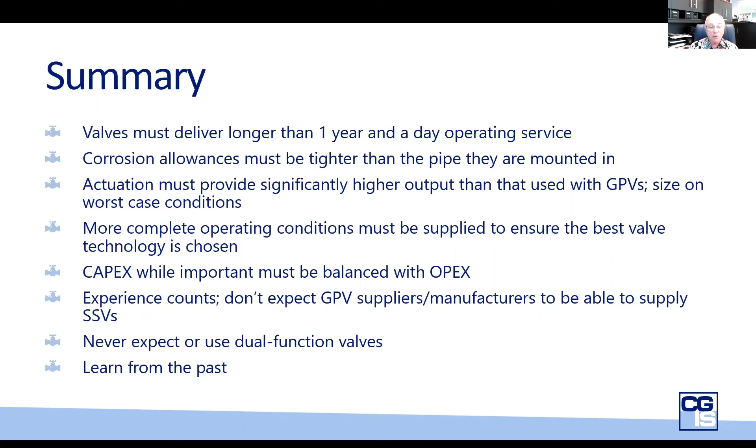Never try and put a control valve in an isolation application or vice versa. They're just not designed to do both. And of course, learn from the past.

That valve lasted literally less than 7 days. So $3,500 times how many times that is in a year, 7 days, that's a lot right now, times 25 years is a lot more money than 60 grand. You've got to buy the appropriate technology.